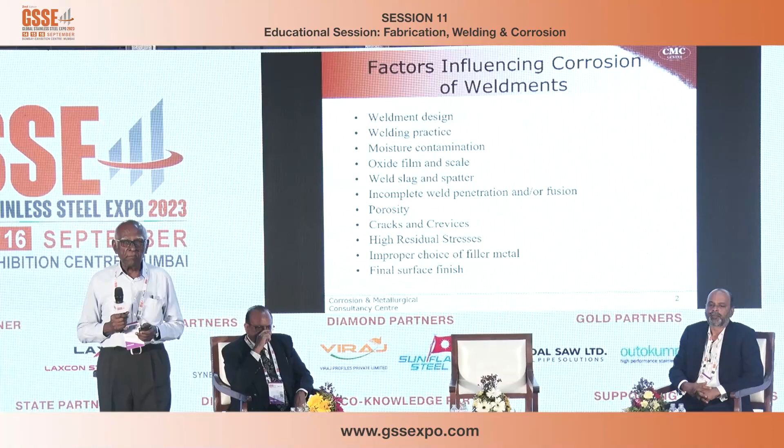But before that, I will briefly mention, Dr. Tanki will expand on some of these items - the factors influencing corrosion of weldments. Weldment design is most important; it should be flush with the parent metal. Welding is after all a joint. If there is any problem with design, you will enter into corrosion problems at that weak point.

The welding practice is very, very important, and the man who is doing the welding need not be an educated man, but he must be thorough with the process of how to make a welding practice.

Moisture contamination is very, very important. The moisture contains hydrogen, and this hydrogen, if the electrodes are not properly dried, will enter into the base metal, not only base metal but weld metal. During welding, water may evaporate, water may dissociate, and then hydrogen will enter. Hydrogen is the smallest element in the periodic table, so it will enter just like sugar enters water, leading to hydrogen cracking and moisture contamination problems.

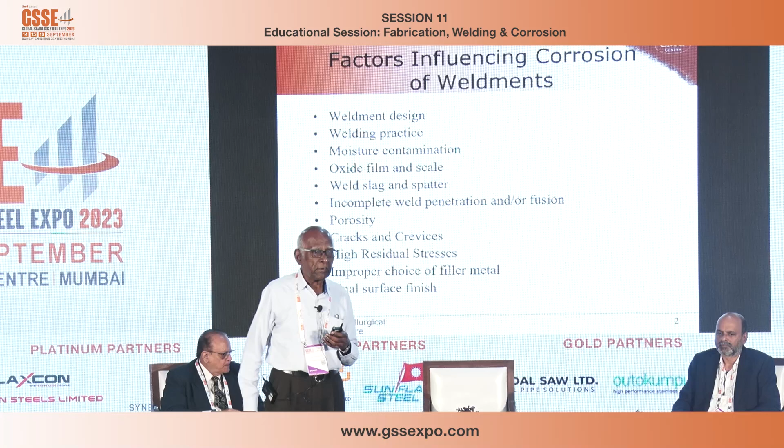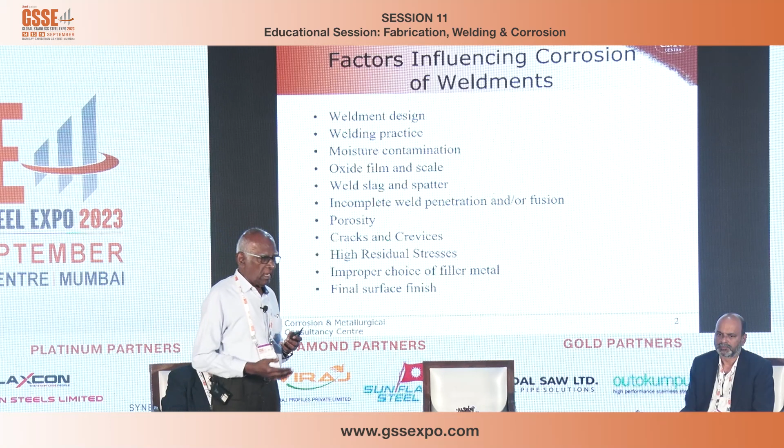So your weld joint, your electrode, everything must be absolutely pure without any dirt or wetness. The oxide film and scale - that is what we call rusting - so all the rust has to be removed if it is steel. And if it is a non-ferrous metal, some aluminum or copper welding, we call it oxide film. The rust is the word used only for steel. So oxide film and scale, weld slag and spatter.

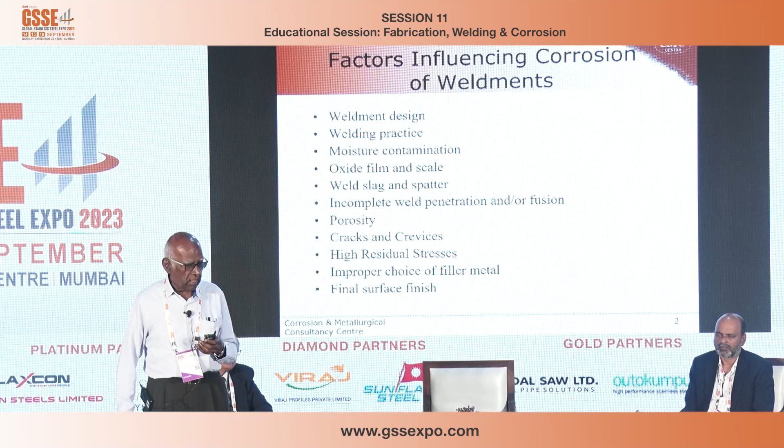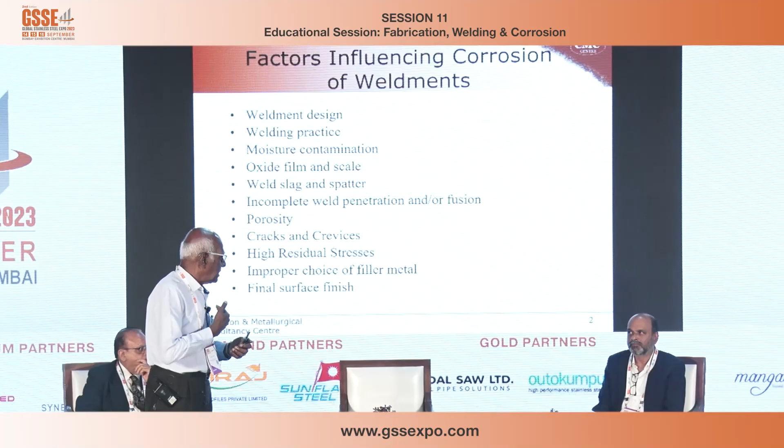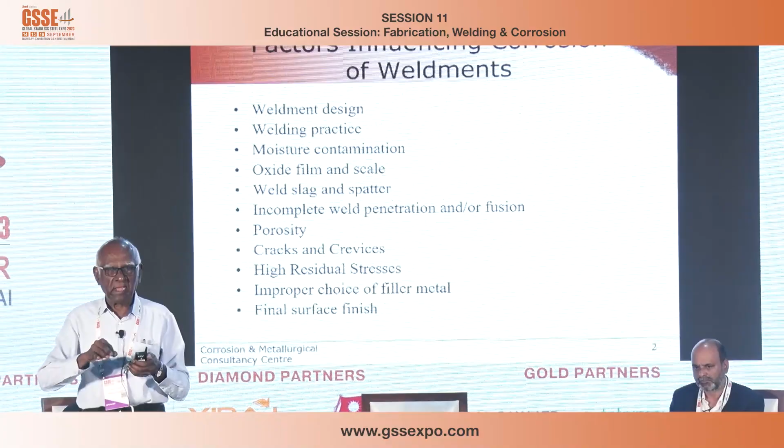During welding, the molten metal doesn't just evaporate, it spatters. I'm sure Parthsarthi will know better - very big companies have a separate workshop for carbon steel and a separate workshop for stainless steel, so you don't mix stainless steel welding with carbon steel welding. You should have this separated, because as soon as hot slag comes and sits on a stainless steel surface, that particular location is no more stainless steel, and you'll get into a corrosion problem there.

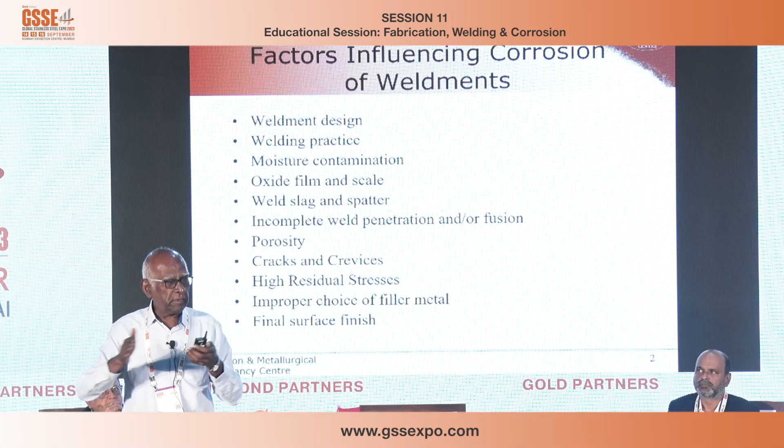Incomplete weld penetration or fusion - if you are welding say about 12 mm thick or 10 mm thick pipe, how do you make sure the welding is okay at the bottom? The weld seems to be okay at the top, but not at the bottom. That's why with incomplete weld penetration, if the weld joint is not proper, there is a small crevice between the two plates welded, and there water will go and stay stagnant, leading to localized corrosion.

The whole purpose of choosing stainless steel is lost - you don't want corrosion, so you have chosen stainless steel, but unfortunately you have not taken the precaution, so it started corroding. So that's incomplete weld penetration.

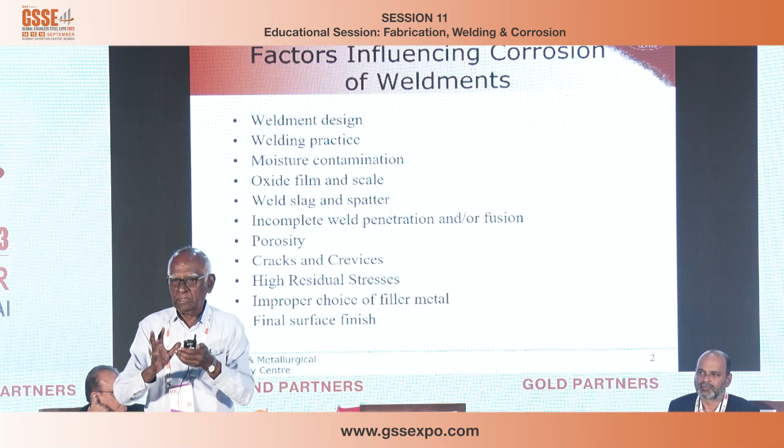Porosity - the moment the molten metal solidifies, if there is any gas present, it will become a pore, meaning it is not stronger. Like a chalk piece, it will break. Like a sponge, it will act as a sponge, not as a solid metal.

Porosity, cracks and crevices - if your plate is not properly fabricated, those cracks and crevices will lead to unusual, unwanted corrosion problems. High residual stresses - when you bring two plates together and weld them, the plates originally are free, and then you bring them together by fusion. The moment you cut off the fusion, the plate will not stay in the same position, it will fly off. That means there is a certain amount of residual stress.

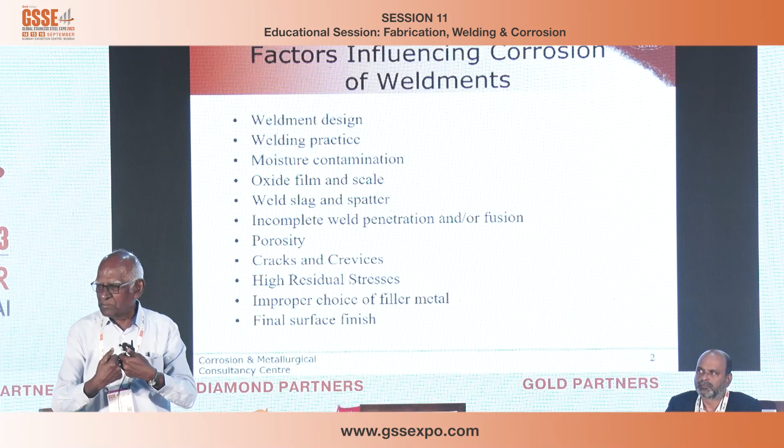Like end of the day, I don't know how fresh you are in the morning at 9:30, but right now you are loaded with so much in the brain and eyes. You are under stress, residual stress, and that residual stress is there on the plate also, so it won't show up. That will lead to a problem. Corrosion has got a soft corner to occur only at the residual stress area.

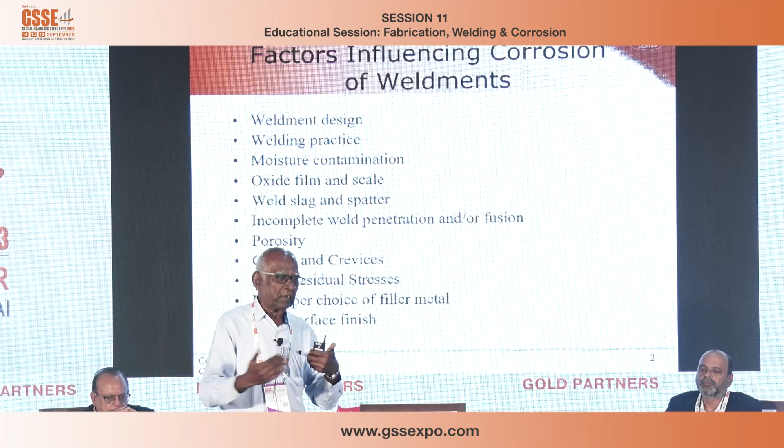That is why the plates are all annealed. The moment you draw a plate from 10 mm to 2 mm, you are putting a lot of work on it. So that work has to be annealed. Annealing means you remove the high residual stress.

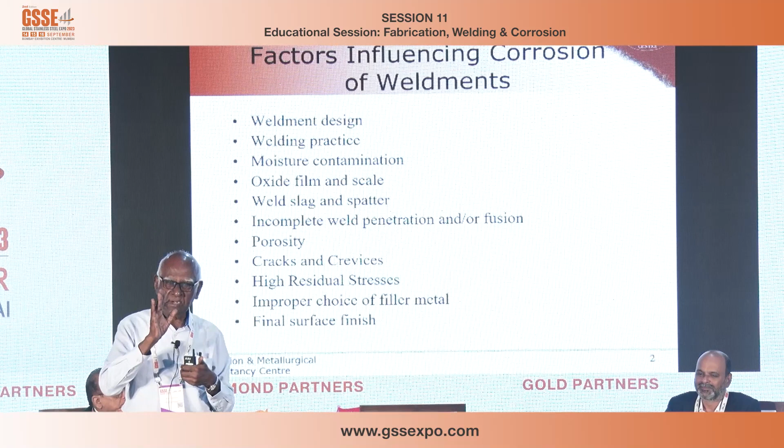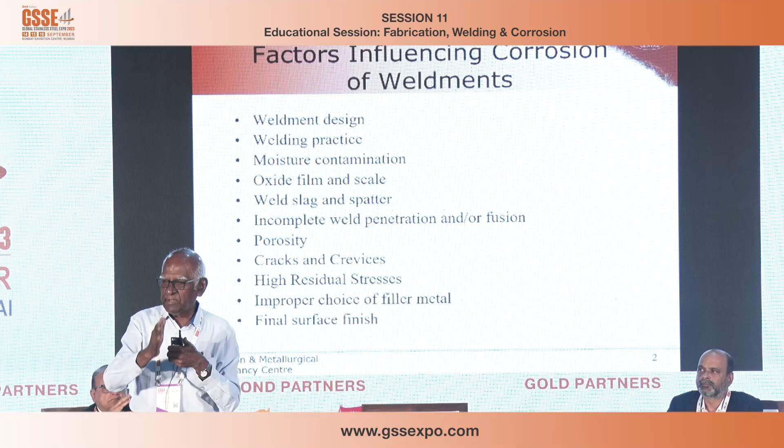Improper choice of filler metal. So many electrodes are there, I don't want to mention the company, but there are big companies specializing only in electrodes. You have to choose a particular electrode - there are 101 of them. How many of you have gone to the shop? Every pavilion you will see 51 grades mentioned, 100 grades mentioned of stainless steel. For every stainless steel combination there is a specific electrode, specific filler metal, specific wire, so that you have to choose. If you are wrong in choosing, you will end up in a problem.

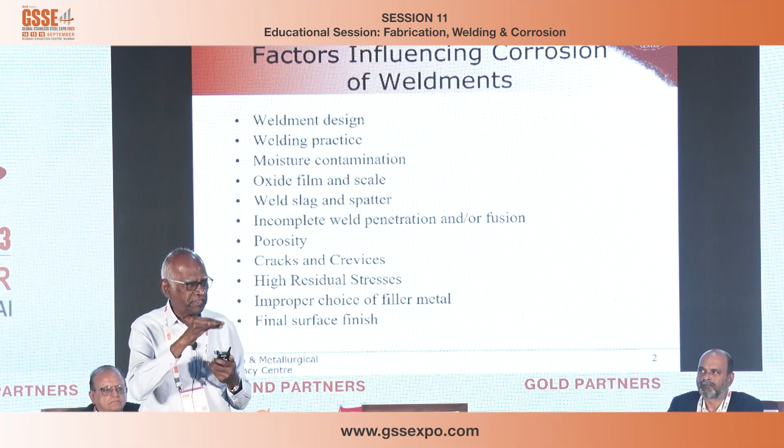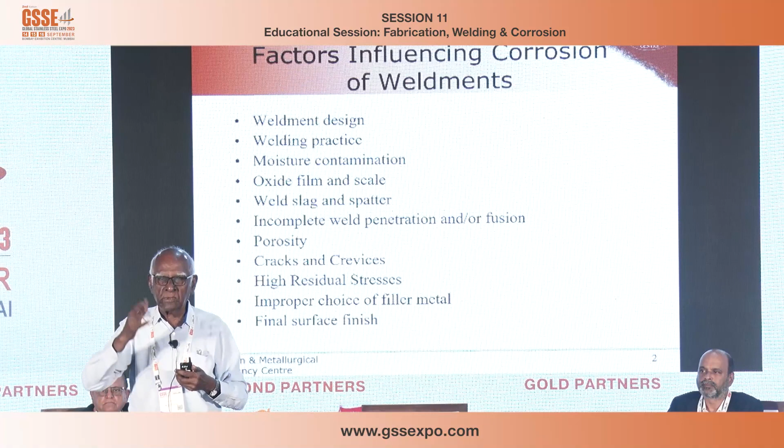Chloride is very bad for stainless steel. But in our household we are dumping so much salt, sambar, rasam on stainless steel - why is it not corroding? Because you are continuously washing. If you allow something to remain there, you will see rusting there. So because of that same process, the same stainless steel plate, if you put in seawater and let it remain stagnant, you'll get a problem. These are the kind of things you must be very careful about in using stainless steel.

And metallurgical factors - being a metallurgist, welding is a part of metallurgy, and there are specific metallurgical factors affecting corrosion of weld assemblies: micro segregation. In the previous session, Dr. Kamachi Mudali was mentioning the effect of small intermetallic components or different phases. So micro segregation within the stainless steel itself, precipitation of secondary phases.

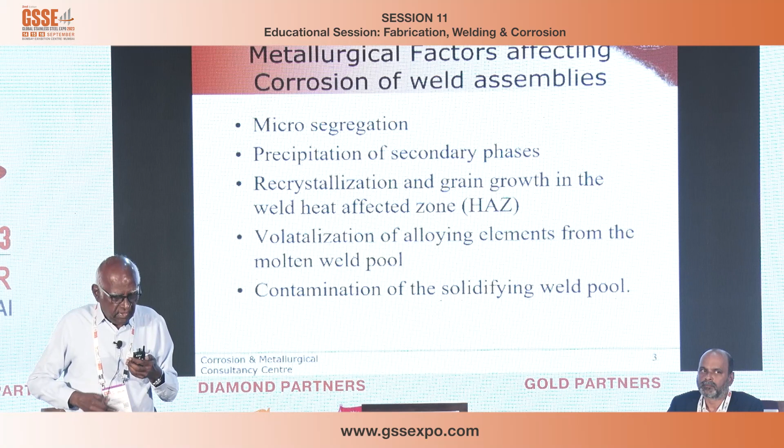I don't want to go through this in detail because there's a lot of metallurgy involved in all these words - recrystallization, HAZ means heat affected zone. These are all metallurgy, but it's very, very important to get the full benefit of stainless steel and to get the full benefit of weld joints.

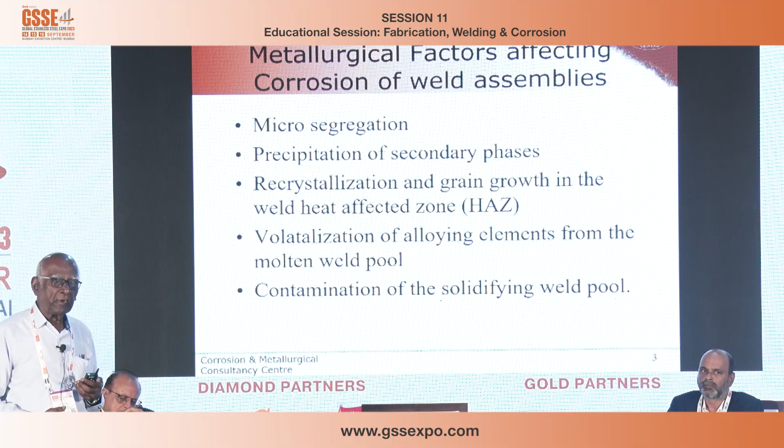That is called a heat affected zone. These are the areas where corrosion will take place, so you must be very, very careful not to have these defects. You can see a couple of companies I've seen that specialize in removing these tints.

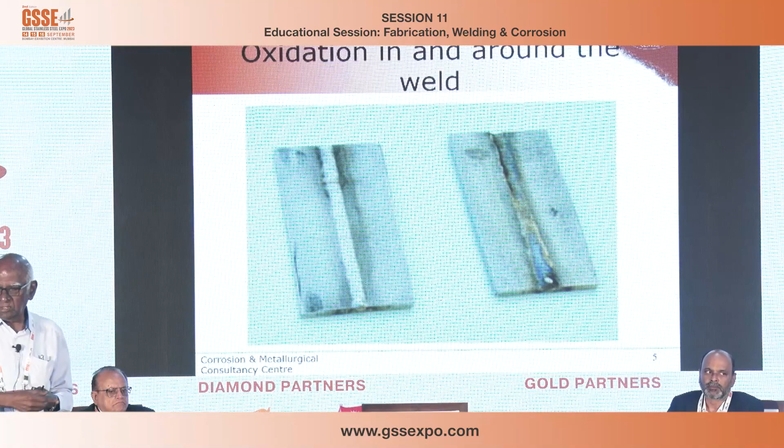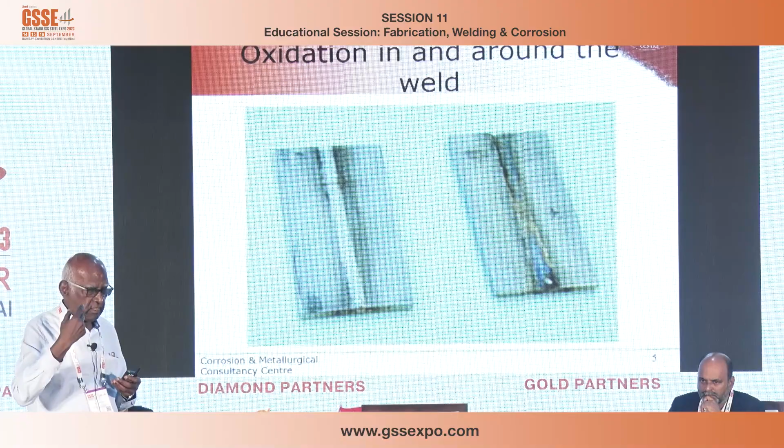This is oxide film - you can see a brownish film. When I say stainless steel, it should be very smooth. That smoothness is not there, and that film affects the so-called chromium oxide, which is very important for corrosion resistance, so that has to be removed.

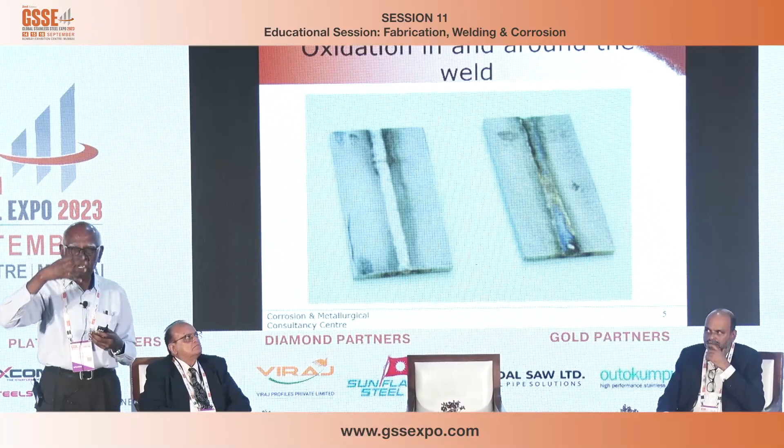It is only polished outside, not inside. So I have seen quite a lot of corrosion problems inside the water tank. This is the problem there.

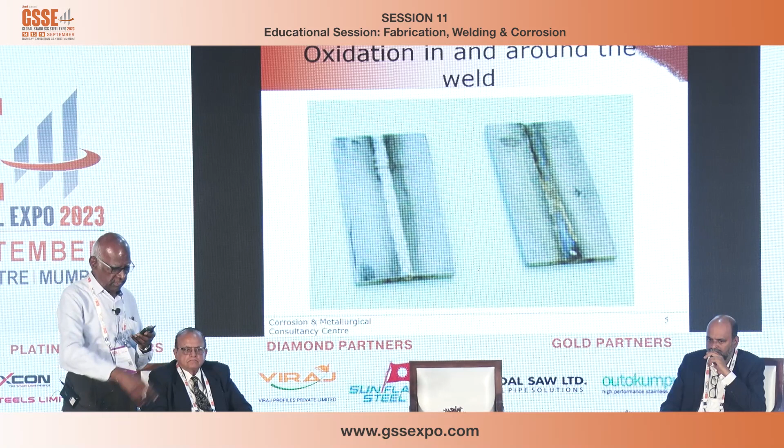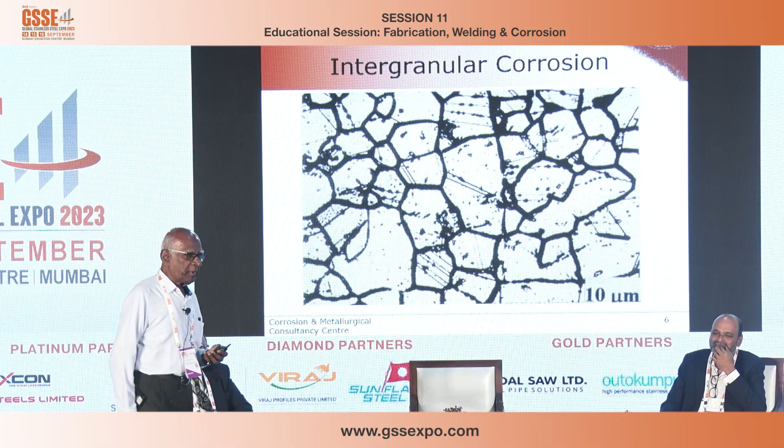So this is a little more metallurgy - after welding, grains are affected. I don't want to go through this at the end of the day - the word intergranular corrosion is high metallurgy. People are getting PhD topics only on that word. So at the end of the day, probably at 6:30 in the morning I can teach you on this, but not at 6:30 in the evening. It's a lot of metallurgy, but it's very, very important.

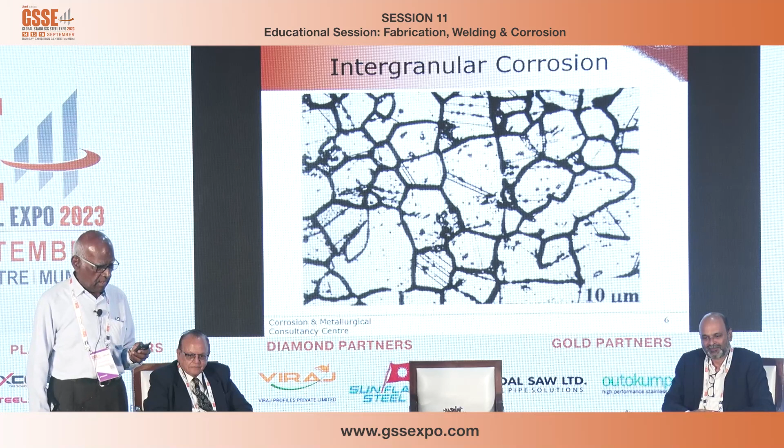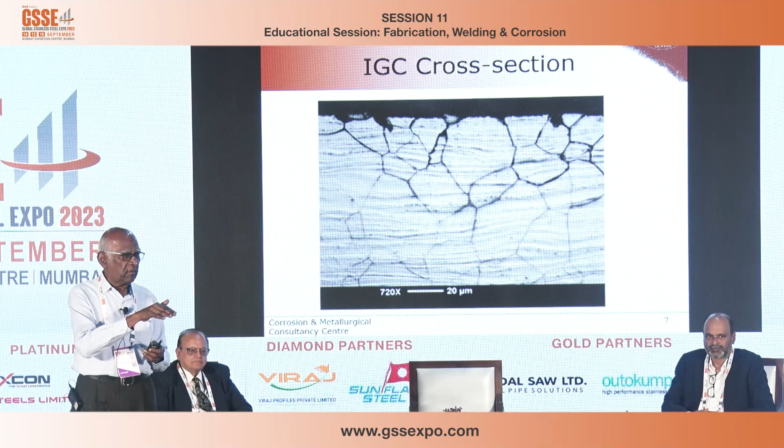So this is how the thickness is lost. You can see part of the thickness is corroded by looking at the dark lines, like a mud pattern. Those are the dark lines where corrosion has occurred, whereas on the top surface, you don't see that much corrosion.

So if you go to a company and bring an ultrasonic wall thickness detector, it won't show any loss of thickness, but corrosion is there. This is very important. It's a localized corrosion, not a wall thickness reduction. It is very, very localized corrosion without showing any NDT value for thickness reduction.

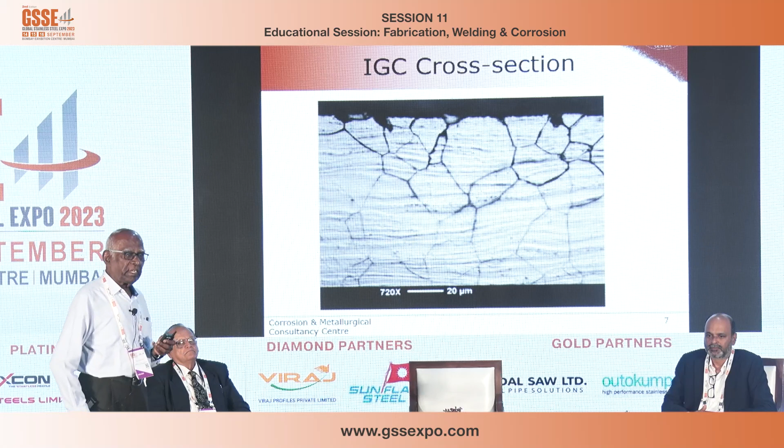So all these are important. By very careful welding and very careful annealing after welding, which is called solution annealing. Like if you put sugar in water, it dissolves. Similarly, you can put chromium in steel and it will dissolve, or carbon in steel and it will dissolve. That is why it is called solution annealing, and that will remove this problem.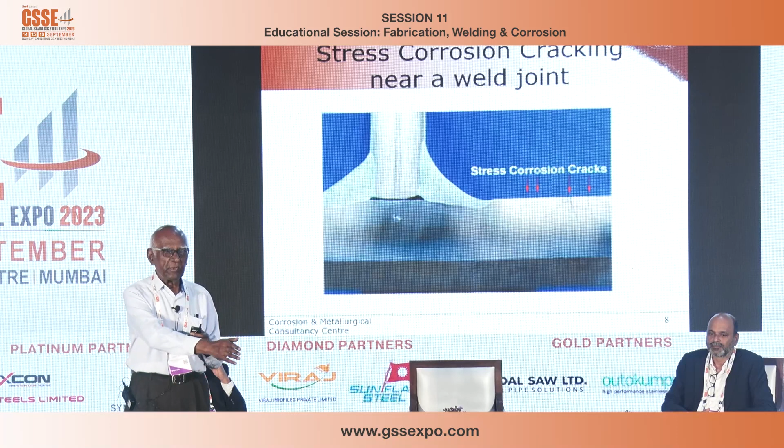This problem is very, very dangerous compared to ordinary corrosion. Ordinary corrosion is what we call rusting. The rusting is something that forms, you know, and that is something you can rub off, but you cannot rub off this. So this is a very dangerous form of localized corrosion.

So with this background, I'll spend another 5-10 minutes and then hand over to my friend's presentation. I'll make one typical case study. I don't know how many of you are from the chemical process industry, but you'll be able to appreciate the problem.

This talks about a 14-inch diameter, 8 mm thick stainless steel pipeline, which suddenly failed after a couple of months of service. It was meant for 25 years of service, but it failed after only a couple of months. This is from a fertilizer plant.

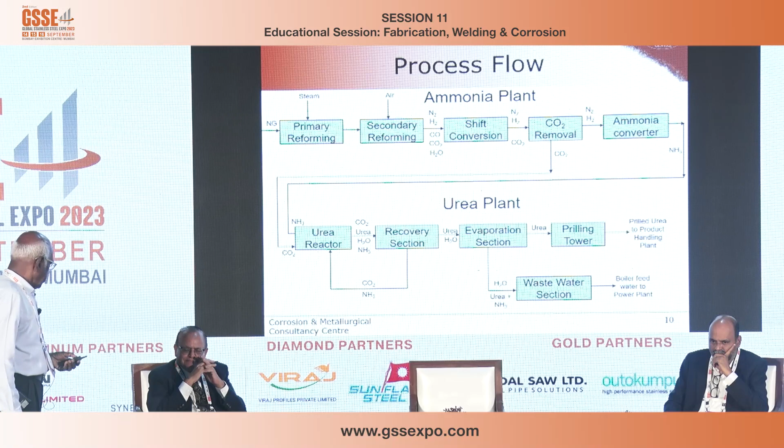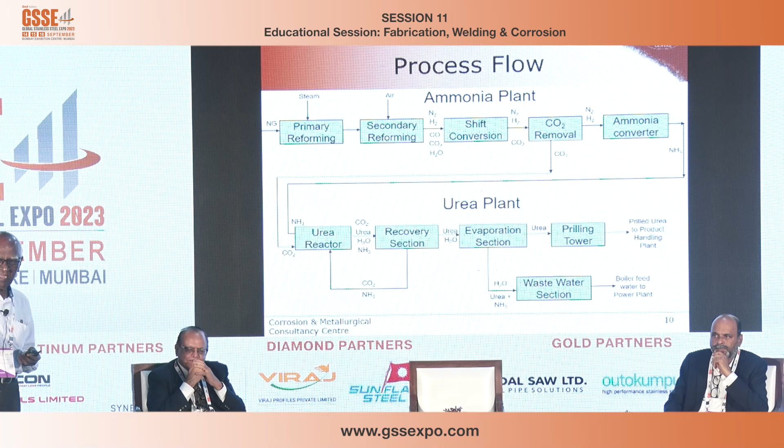You can see urea is made out of ammonia and CO2 combination. You have to remove the CO2 and send it to the air, and balance the NH3. That's why we talk about green nowadays. Again, you react with CO2 to produce urea.

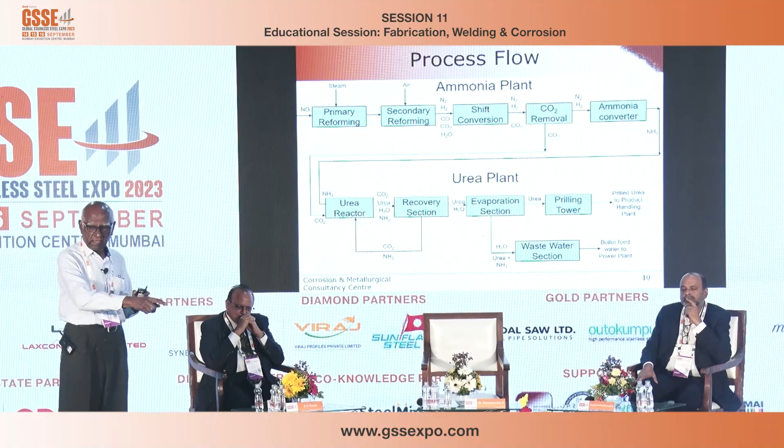So at one particular location, in normal practice - Dr. Tanki will be expert on this - most ammonia plants use carbon steel metallurgy, whereas the urea plant uses stainless steel metallurgy. So this happened in the urea plant circuit.

That particular location is called the vacuum preconcentrator section. We won't go into detail, but that particular line, shown in red color, suddenly burst. Even though the plant was designed for very high pressure.

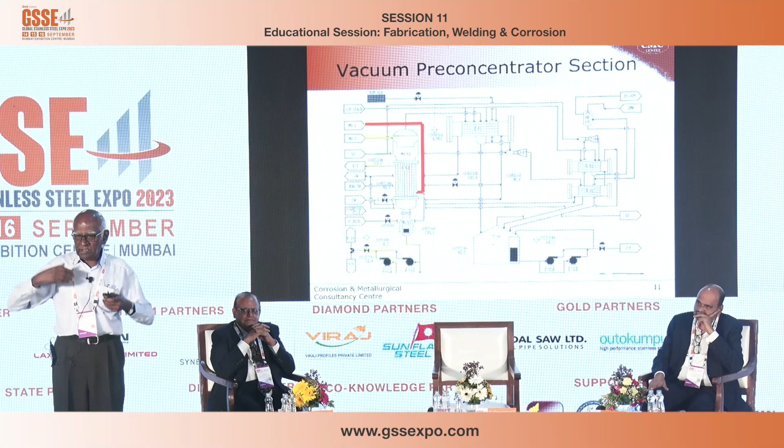Fortunately, it was an automatic plant, so nobody was injured, unlike Bhopal, where suddenly a pipe burst killing so many people. But here, nobody was injured. But you can look at the stainless steel pipe.

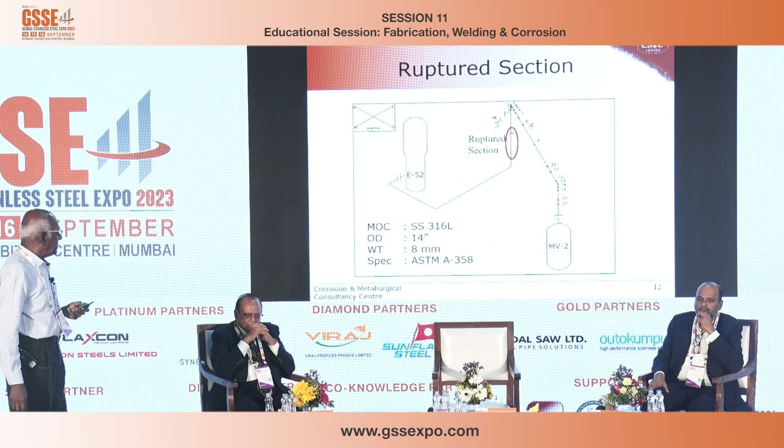And this is a little detail. You can see at the bottom, it's 316L stainless steel. If you go through all the pavilions, 90% of the shops talk about 316L stainless steel. It is 14-inch diameter and 8 mm thickness, made out of ASTM A358. All these are standardized.

It's high pressure, high temperature urea solution that suddenly burst. If you were there, you couldn't even tolerate a few seconds. Fortunately nobody was there, since the plant is computerized. And it happened during the night shift.

See, the parent metal is okay, it is not thinned down. It has not become like a balloon and then burst. It's purely that something is wrong with the weld. This we call a dead body - a pipe is a dead body, there's no use of that. So we are like post-mortem doctors. It is very useful for us.

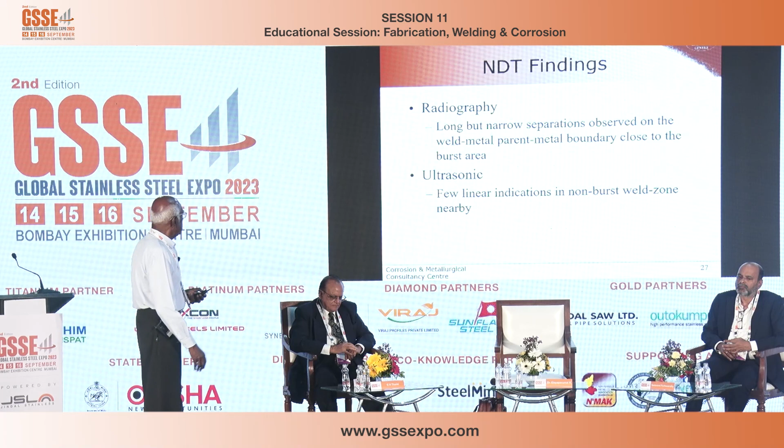So crevice corrosion has happened here, and that is the cross section of the ID and the cross section of the middle of the fracture surface. Radiography and ultrasonic showed definitely there is a partition between the weld metal and the parent metal.

But that has been assumed as not going to make any problem, so the third party inspector passed the pipe. The diagnosis: incomplete fusion of the parent metal and weld metal on the inside surface over a distance, that formed a longitudinal crevice corrosion.

That's a form of corrosion - we don't want to go into the detail. There are several forms of corrosion, out of which crevice corrosion over a period of time, which is only for a few months, causes gradual reduction of the load-bearing wall thickness. At that particular location, it has become a balloon.

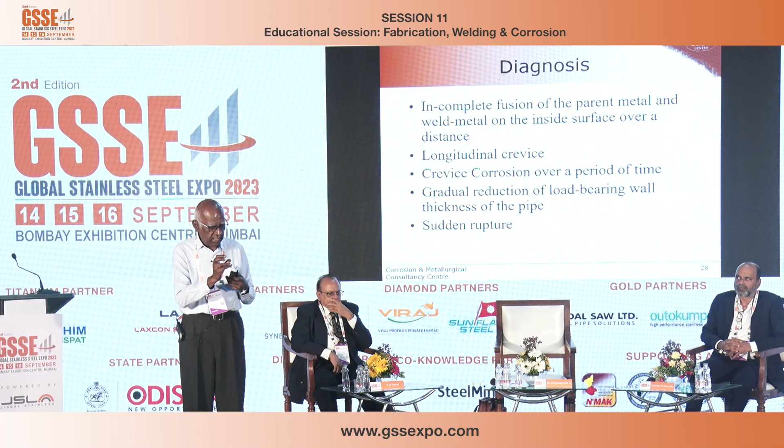So it is a sudden rupture. This should have been avoided by proper radiographic inspection carried out during procurement of the pipe. The radiography inspection is to check the soundness of the weld, and the pipe may be qualified, but not the weld joint.

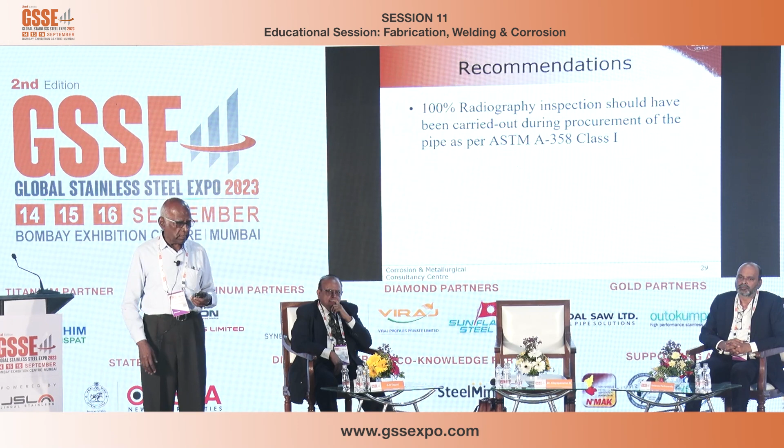Thank you, we get into the topic of fabrication, welding and corrosion. Dr. Ilember Perumal has already set the standards for this session. Right from morning I was sitting in this room listening to various lectures, starting from Mr. L.C. Trivedi from the railways, talking about various components like wagons, coaches, and various other parts of the rolling stock. I would like to say all these are not possible without welding.

I would proudly say Fronius is the name of the company I represent. We are actually doing the welding and joining of the entire metro manufactured by Alstom, and also the manufacturing of the coaches running in Pune, which is once again of aluminum alloy.

We are also making a lot of nation building exercises, like we are a part of Chandrayaan 3 in terms of making the entire components for the launch vehicle Mark 3. Fronius is one company manufacturing welding equipment used for various joining processes. The first part about wagons was also covered by me.

Dr. Kamachi Mudali was talking about defense manufacturing, and Dr. Gunasegar from the Naval Materials Research Lab. We are also associated with various research labs in India, and we provide support for nuclear submarines - we are welding the nuclear submarines, and we are part of projects like Scorpene and many other leading projects in India.

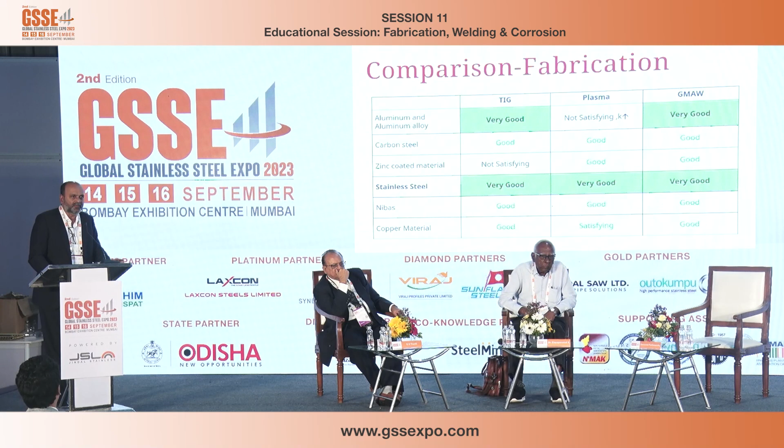But before that, I would like to tell you there are various metals available which are weldable, like aluminum alloys, regular carbon steels. There are coated steels called zinc coated or galvanized steels. We also have stainless steel, certain nickel based alloys, and copper alloys.

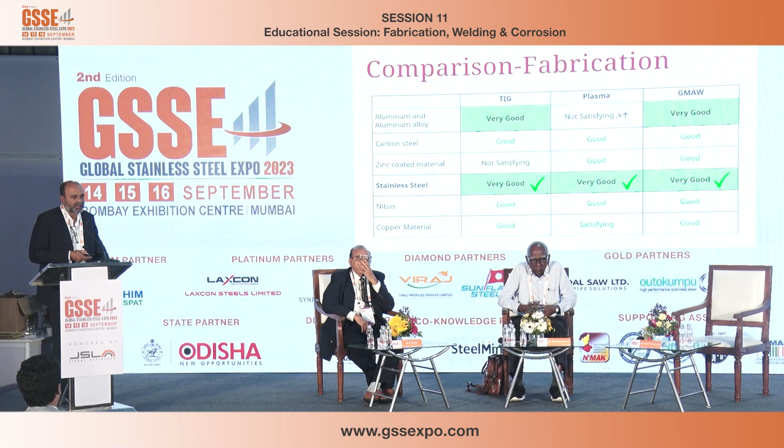So out of all these alloys, stainless steel is weldable with all the processes - TIG welding, plasma welding, or even MIG welding, it's very much possible with all welding processes. So let's go to the next type of welding, where you can see a new process name called cycle TIG.

Cycle TIG is used for stainless steel, which has been displayed today in our pavilion. Cycle TIG is nothing but an interval TIG welding, which uses a polarity called direct current electrode negative polarity.

What is the advantage of cycle TIG? Our moderator was explaining about the weld puddle and how you are able to control it. This can be very easily controlled with this process, and we can have a combination of pulsing in TIG along with a function called tacking.

We also have to have very controlled heat input on stainless steels, particularly with respect to the austenitic grade of stainless steels, the 300 series. So we can use this process for that.

There is another aspect called temper colors, which is nothing but oxidation, causing various color changes in stainless steel. When it comes to the aesthetic part, it is very important. So let me show you how cycle TIG looks when used on stainless steel.

Here I take an example of a 1.5 mm thick material and a 4 mm thick material, where you can see the look and feel of cycle TIG when I weld a 1.5 mm fillet weld - this joint is called a fillet joint - where you can weld even 1.5 mm thickness without any change in the color of the weld seam. You can see the heat affected zone is very, very controlled.

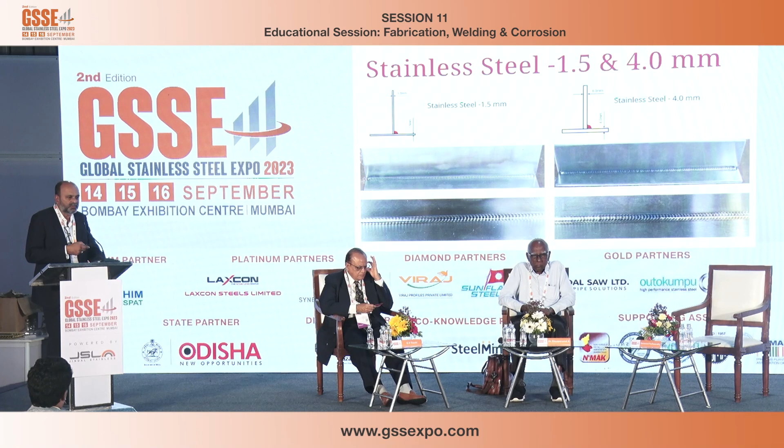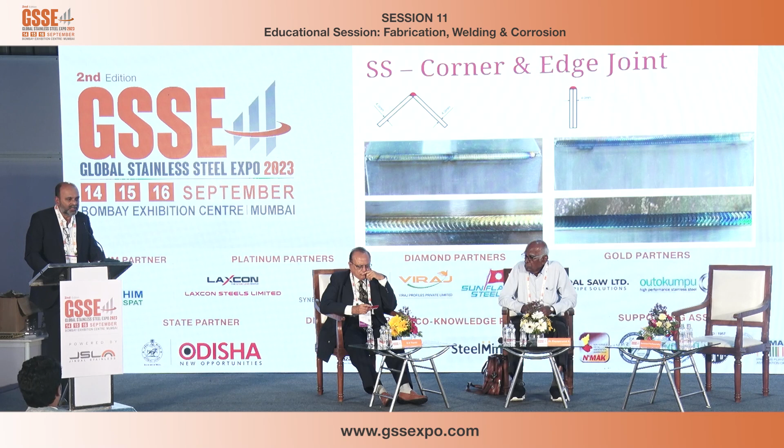Then coming to other types of joints - the corner joint shown here, and then an edge joint. You can see the weld seam is very uniform. These are all done by manual welding process, and this was displayed for the last 3 days at our stall. My colleague here has also done the welding, and this is very much possible with stainless steel.

So moving forward, you can see a cycle TIG process done on a 1.4301, which is nothing but the 304 grade of stainless steel, 1 mm thick, with very low amperage and very low heat input. That is very important.

Somebody who can appreciate welding can see something called kilojoules per centimeter, which is 0.778 kilojoules per centimeter in this particular 1 mm thick component. This is possible with a special gas nozzle called a champagne gas nozzle, which gives a very high amount of gas flow with the help of a special gas lens. I will be able to weld even a 1 mm thick material without any undulation or distortion.

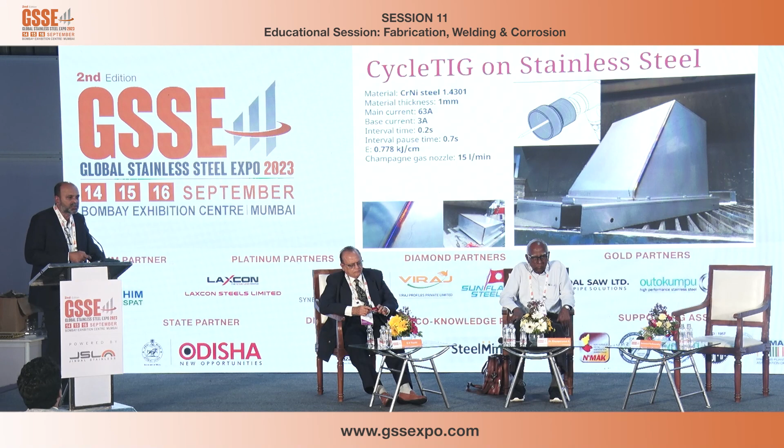These are all technologies used for areas where weld aesthetics play an important role. Now suppose I want to build on an edge, like you can see some sawtooth kind of formation in this picture. I can show you how I will control the heat input and weld on these particular tooth points.

I would request our friends to play the video so that you can at least hear. You can see how the control is.

Those who have not seen the exact process can appreciate by looking at how controlled heat input plays a major role in interval welding. You can even have a very low heat input. So I will move on further.

This is another important aspect I'd like to touch upon - titanium. Chromium, titanium, and all these alloys have very high affinity towards oxygen, but still I will be able to weld a titanium alloy without any kind of protection. Here also there is a video.

Because of paucity of time, I'll switch over to the next, which is called the TIG dynamic wire. In TIG welding, normally a manual intervention of feeding the filler happens. But today we will be able to do this even with a hand, using a separate arrangement with a separate kind of pen.

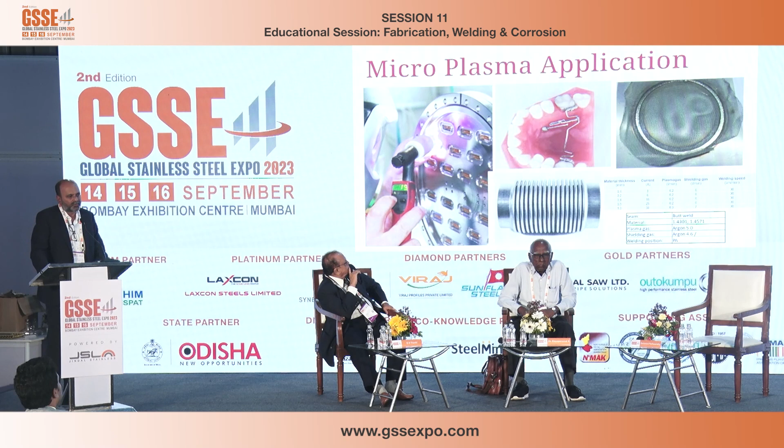Moving on further from TIG welding to plasma arc welding. Microplasma is one process where I can even weld 0.1 mm thick material. You can see some dentures, dental fixtures, and some kind of bellows which are 0.1 mm thickness. This is also possible to weld - this is stainless steel, both 304 and also 316L. With the help of microplasma, we have welded these kinds of applications.

Moving on further, we have soft plasma. This plasma arc welding can be used in various exhaust components, and here you can weld from 1 mm to 3 mm. This is another kind of application in stainless steel, particularly for plasma welding - this is called soft plasma.

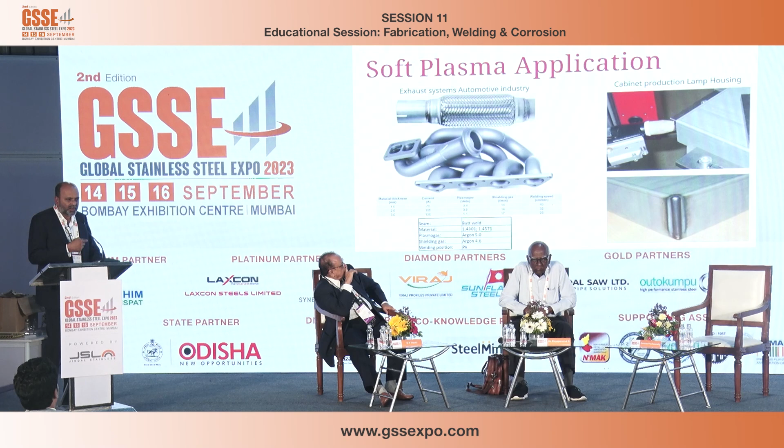Moving on further, for high thickness you have something called plasma keyhole. Here we can weld up to 10 mm thick material with the help of plasma keyhole. We create a keyhole and move on and we are able to do the welding. I have given certain parameters also wherein I have even gone up to 10 mm thickness. So this is the various kinds of processes in plasma.

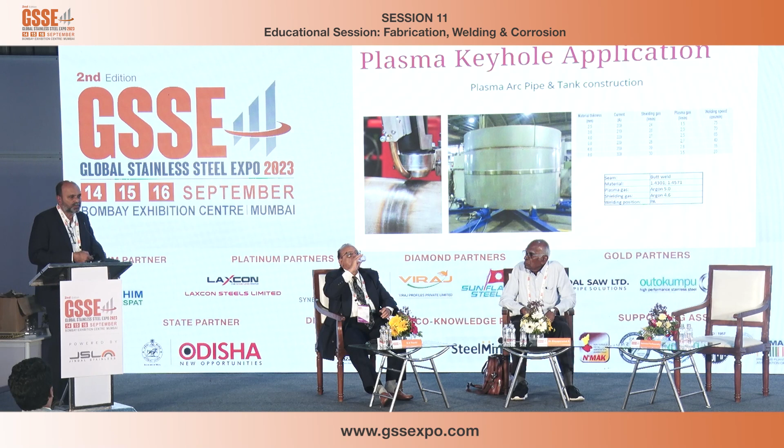Furthermore, gas metal arc is another process conventionally called MIG-MAG welding. Here you can see a process called cold metal transfer. You can see this video - can you play the video? That will give you some idea.

This is a patented process of Fronius, where there's a separate mechanism by which the wire moves forward and backward, and I will be able to even join steel to aluminum. This is the process advantage, and you can see here this particular robot is being programmed to make a kind of an additive manufacturing component from nowhere. You can build from a substrate and build a component with the help of this.

So today, welding is not what we see on the roadside. Welding is something we call from 3D to 3C. Welding was originally very dusty, dangerous and dirty, but today it has become very cool, clean and clever. So we have moved from 3D to 3C. This is what welding is in the industry today.

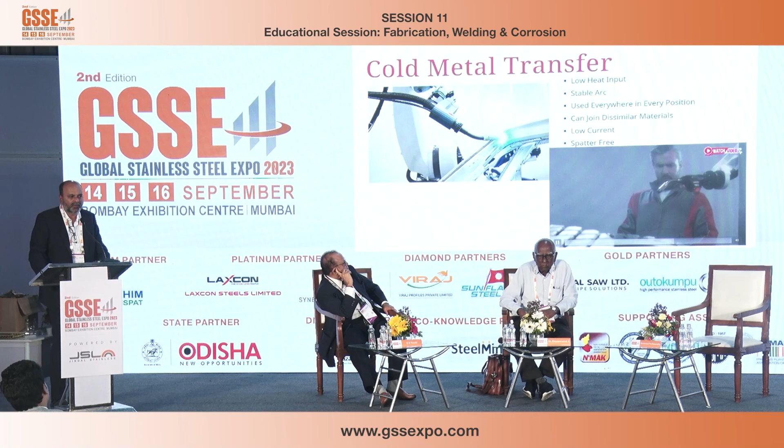This is actually the specific patented process of Fronius, called cold metal transfer, where with the help of this you can build, join, clad - all types of processes in one kind of process, which is called cold metal transfer.

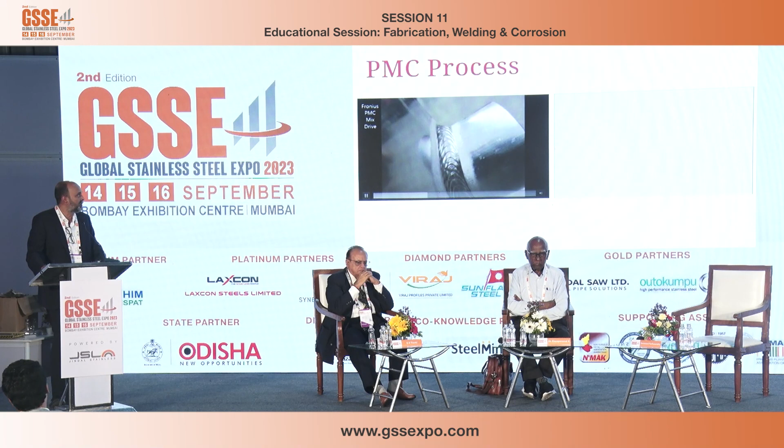So here, something called pulse multi-control. This is another process of GMAW, wherein you will be able to weld with the help of the robot, where you can have a kind of weld seam, which will be shown to you now. You can see the seam, which is a modification of pulse welding. It's called pulse multi-control, where I'll be able to weld this kind of seam, and all the ill effects of heat can be avoided.

A welding engineer can understand the sound, and he can tell what kind of process is going on. So here it is actually a pulse process, a modified pulse process.

I would request to play the next video also, so you can understand how robotic welding helps in welding of stainless steel. So here is an experiment we did for L&T Ranoli, where we used this pulse multi-control process. I am not showing you any component because of NDA, because of certain non-disclosure agreements. This is just a kind of fillet joint with a robot, once again on stainless steel.

You can see the deposit when the welding is complete. This was done at our skill center in Pune, Innovation and Skill Center, where you can see such weld seams without spatters, without any kind of color change. So these are all possible. These processes are being used in the industry where high productivity is required for thicker grades of stainless steel.

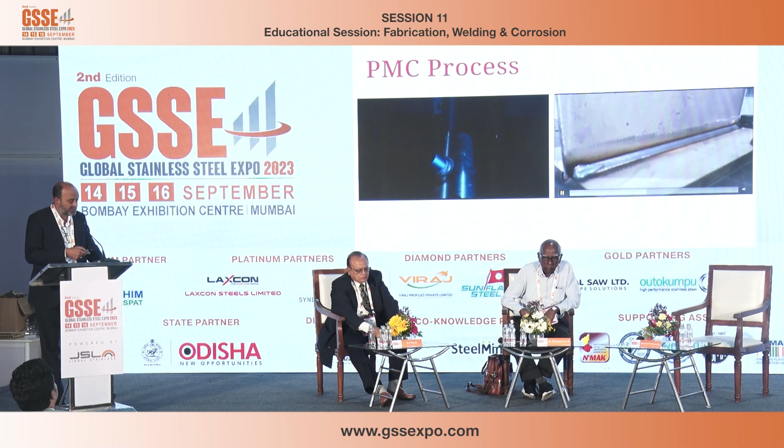Furthermore, additive manufacturing is another area where you can actually build components from nowhere. You can take a substrate, and with the help of the filler wire, keep building components, and then machine it further. So the conventional process was subtractive manufacturing, but today with stainless steel you can actually make components as well.

You can make components like valves. There are components like landing gears. There are components like rocket propellant tanks, which are all made out of additive manufacturing, and stainless steel is extensively being used in many areas.

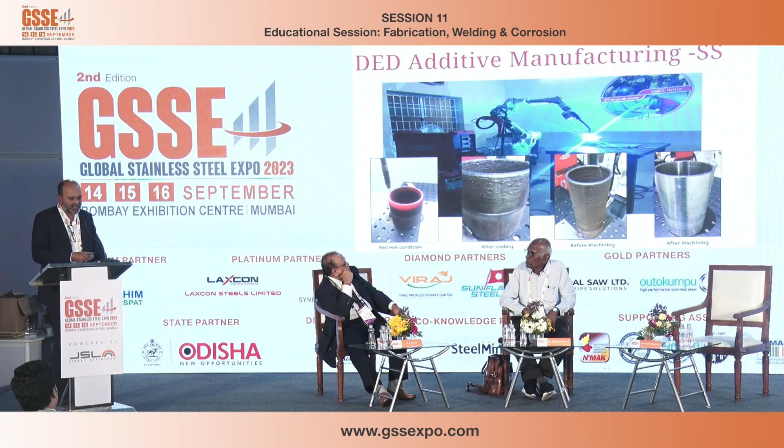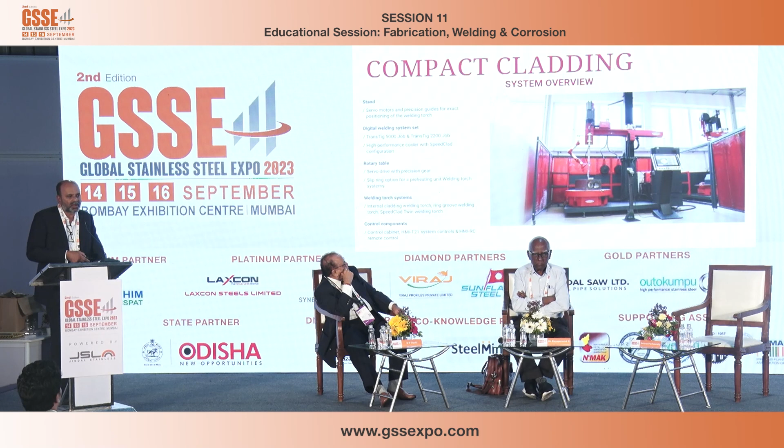Furthermore, mechanized processes - we have many types of mechanized processes possible. There is something called a clamping bench, something called compact cladding. Furthermore, if you want to do mechanized welding, you can also go for a circular welding mechanism, where you can mount the component and still be able to do the welding with the help of these features, which are called compact welding systems.

Last but not the least, I would like to say we are also working with all the IITs and NITs across Pan-India, where we are able to give them technology transfer. We can make custom-made welding cells.

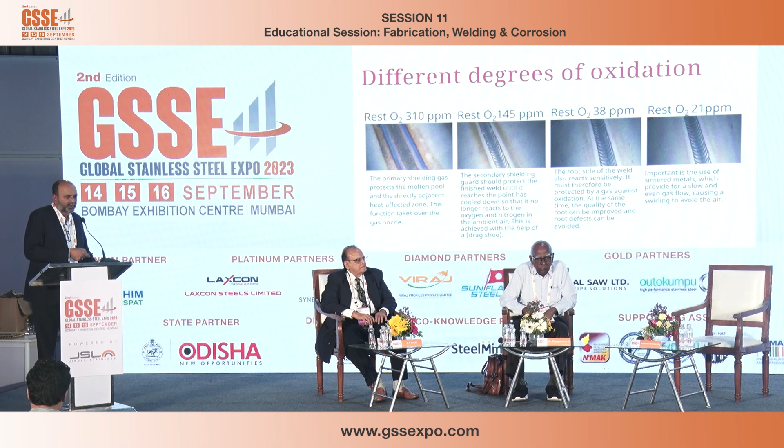These are all the various kinds of oxidation issues. So here you can see the amount of oxygen, which is always less than 20 ppm. Then you will be able to have a very good seam. That's what I want to add on the oxidation front of stainless steel, which has to always be taken care of when you are doing the purging.

So there are various types of purging gases. We can have argon, nitrogen, then nitrogen-hydrogen mixtures, argon mixtures. These are all used in stainless steel when you do welding of a pipe.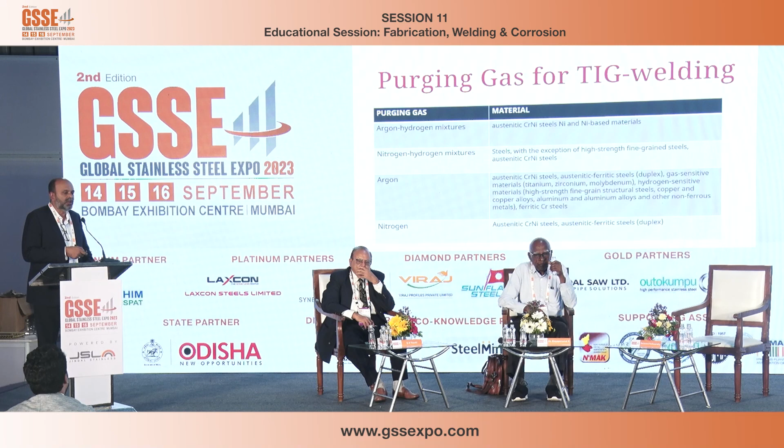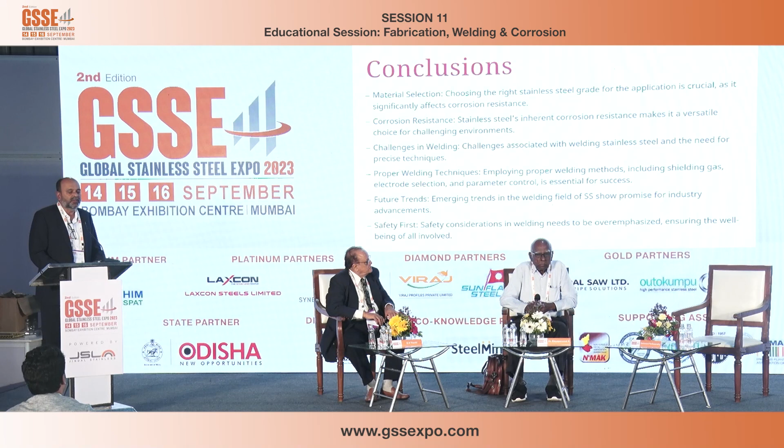So in conclusion, you have to choose the material in the right way. Then corrosion resistance is a very important aspect you have to check. And there are many challenges in welding, but we will be able to take care of the challenges by using the proper technique. And the trends are emerging. And above all, safety is very, very important when you are actually doing the welding. And this also has to be considered. And with this, I conclude.

Thank you. Talk about a huge plate welding. You can see the range of application of welding. So Fronius, we are very lucky to have Fronius with us. And now we go back with full confidence. There is somebody to suggest welding and somebody to execute the welding.

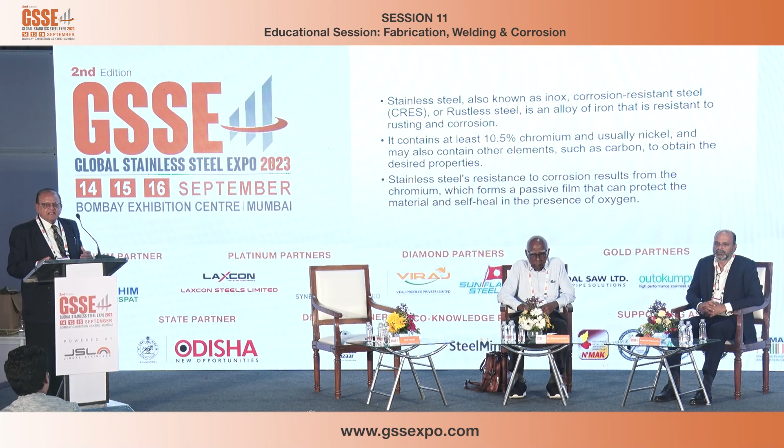Stainless steel, also known as inox, corrosion resistant steel or rustless steel, is an alloy of iron that is resistant to rusting and corrosion. It contains at least 10.5% chromium and usually nickel, and may also contain other elements such as carbon to obtain the desired properties. Stainless steel's resistance to corrosion results from the chromium, which forms a passive film that can protect the material and self-heal in the presence of oxygen. I think these are the basics, but it will give you a good runway to fly ahead.

The alloy's properties, such as luster and resistance to corrosion, are useful in many applications. Stainless steel can be rolled into sheets, plates, bars, wires, and tubing. These can be used in cookware, cutlery, surgical instruments, major appliances, vehicles, construction material in large buildings, industrial equipment, for example paper mills, chemical plants, water treatment, and storage tanks and tankers for chemicals and food products. So it is a very versatile material of construction, which is the positive aspect of it.

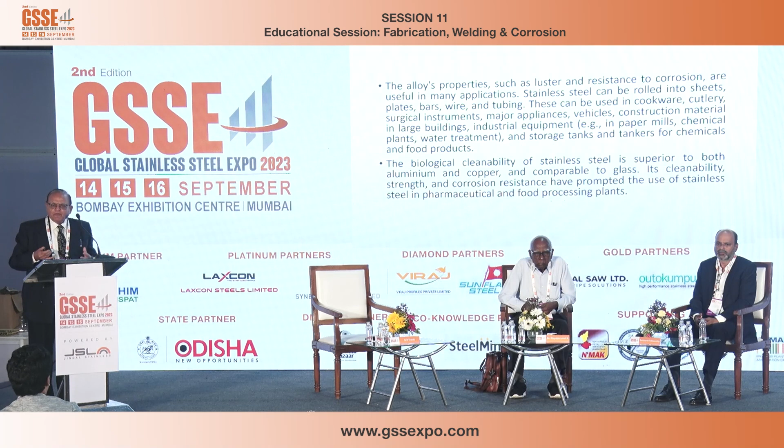The biological cleanability of stainless steel is superior to both aluminum and copper, and comparable to glass. Its cleanability, strength, and corrosion resistance have prompted the use of stainless steel in pharmaceutical and food processing plants also. So we fell in love with stainless steel. Okay, these are good things. But where those good things become a little alarming, that we have to look into.

Six mistakes to avoid in metal fabrication. Metal fabrication is one of the oldest manufacturing processes in the world. Although it has evolved over the years, it still requires a significant amount of training and practice to master. I hope Mr. Shashi will agree in that case, no? A lot of training is required, so you are the good trainer, in reality.

Today there are various types of automated equipment, which we just saw in the various videos which Mr. Shashi showed us, used for the purpose of metal fabrication. While the metal fabricators themselves are trained and skilled, there are certain common mistakes that happen during the metal fabrication process - that is what you want to see at the micro level. Don't forget, as in my first slide, that man is open to mistakes, and welders are human beings. So they are not the culprit, they are the workhorse in that case. These mistakes may escalate while dealing with high pressure and high temperature industrial applications, sometimes endangering the lives of people working. Therefore, this presentation sheds light on the mistakes that are essential to avoid during metal fabrication.

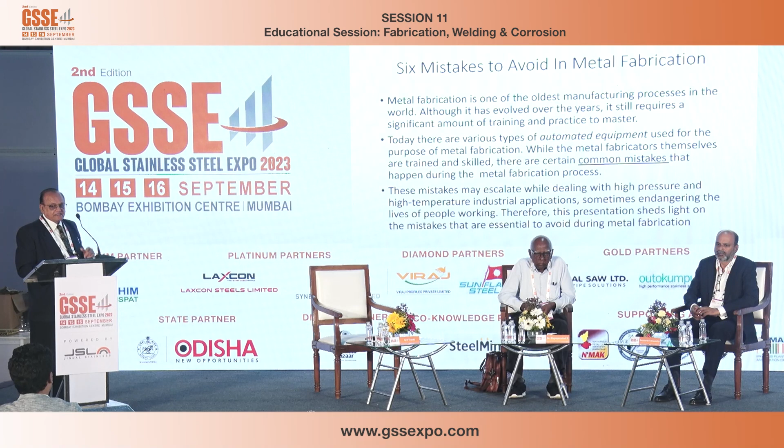Now, precautions to take during metal fabrication to avoid common yet hazardous mistakes. Metal workers are expected to be cautious about the following factors.

First, making pseudo assumptions. Metal fabrication is a mechanical process that impacts several industrial applications. The performance of any equipment depends on its construction and the reliability of integrated parts. Every business has different specifications for metal fabrication, so the fabricator must avoid pseudo assumptions. Instead, he should communicate with clients to understand their technical requirements, which helps reduce manufacturing defects, honor deadlines, offer the right quotations, and so on.

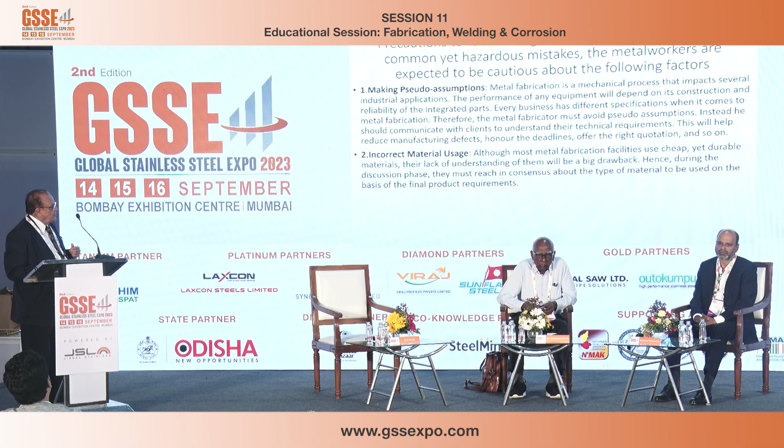Second is incorrect material usage. Although most metal fabrication facilities use cheap yet durable materials, their lack of understanding of them is a big drawback. Hence, during the discussion phase, they must reach a consensus about the type of material to be used based on the final product requirement.

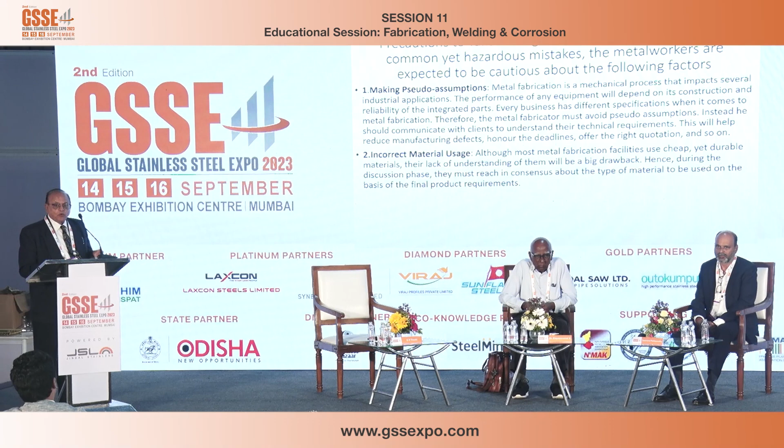These are very important points, which I have brought from experience and from the literature.

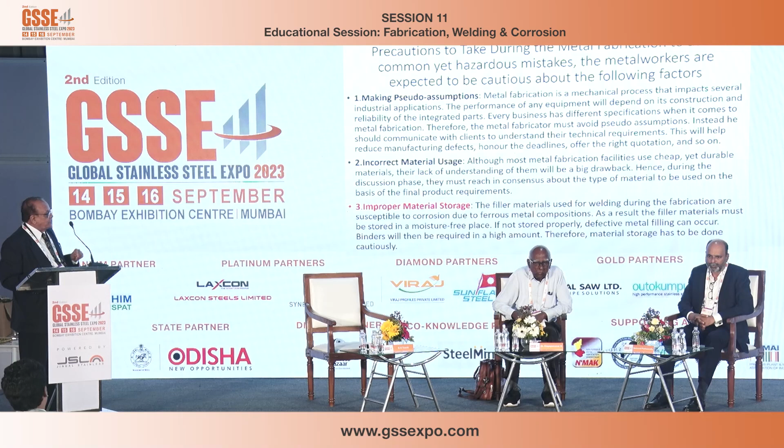This is very important - why improper material storage matters. The filler materials used for welding during fabrication are susceptible to corrosion due to their ferrous metal composition. As a result, filler materials must be stored in a moisture-free place. If not stored properly, defective metal filling can occur, and binders will then be required in high amounts. Therefore, material storage has to be done cautiously.

I will take a pause here and share my personal experience. About 3 years back, six countries, including India, were involved in manufacturing huge stainless steel heat exchangers for Qatar Fertilizer, QAFCO.

When that material was to be installed, QAFCO didn't have time to install it, so they asked for a delay of a few months until they had their downtime. During that time - I won't name certain things as it's against certain laws - they asked us to store it somewhere and said they would come back afterwards. It took about one year and six months to get the order back.

I think one of our people was among the final ones to have direct talks with the Qatar company, QAFCO. After that six months it came and was installed properly. Having an expected service life of 10 years, it failed within 2 years and 8 months.

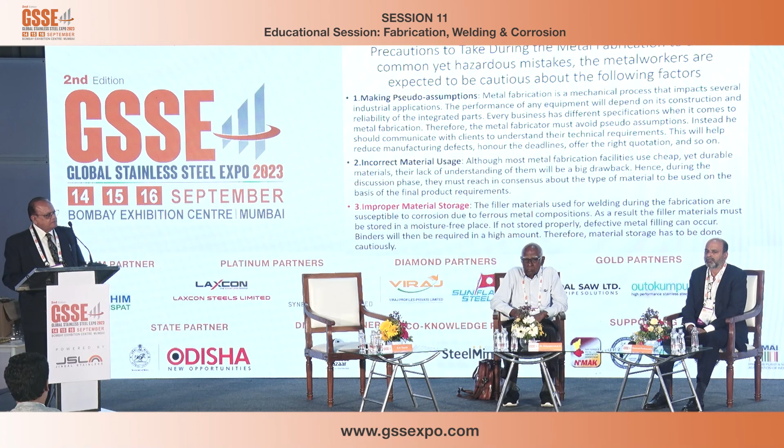Technical inflexibility. Metal fabrication is a process that involves multiple techniques. These techniques may vary depending on the application. Inflexible metal fabricators may obstruct the fabrication process. Fabrication techniques must be tailored to a specific job, and workers need to be versatile. Versatile - I place a lot of importance on this one.

Inefficient time scheduling. Metal fabrication is a process that really relies on factors like material, work consistency, temperature, pressure, and time. The fabrication of metal is a time-consuming activity as the filler metal and welds take time to settle on the application spot. Rushing the job without scheduling proper lead time increases the risk for accidents. The fabrication process must be properly scheduled for productive results.

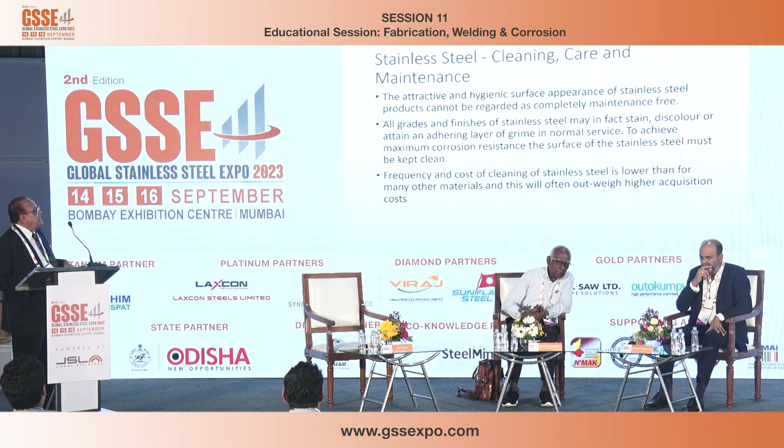Frequency and cost of cleaning of stainless steel is lower than for many other materials, and this will often outweigh higher acquisition cost.

Good housekeeping during manufacturing - this is fabrication. The ideal is to have workshops and machinery dedicated to only stainless steel work. But in a workshop also processing other steel, avoid pickup from tooling used with other metals: grinding wheels, wire brushes, finishing belts, steel storage racks, contamination by grinding or welding sparks, handling equipment, adjacent carbon steel fabrication - which I could see wherever I worked as advisor to the industries. It was my first and foremost advice that they should make a very specific workshop for that.

Getting the best out of stainless steel - main issues include the importance of surface finish in determining corrosion resistance. I will not detail it, I think you will be getting that later on. You can read it because time is running away.

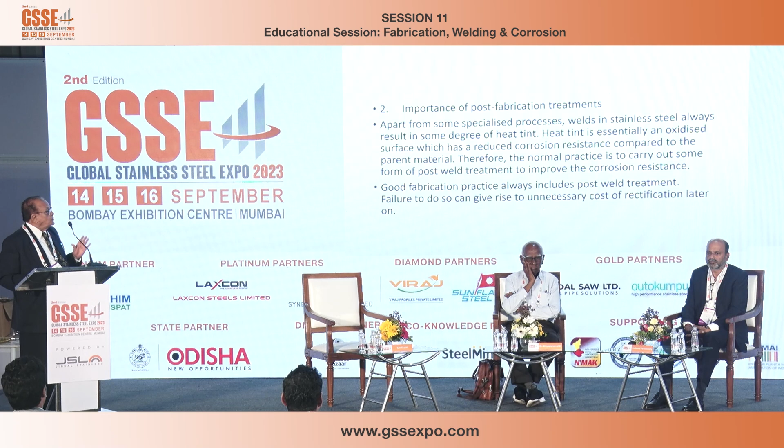Importance of post-fabrication treatment: apart from some specialized processes, welds in stainless steel always result in a small degree of heat tint. Heat tint is essentially an oxidized surface which has reduced corrosion resistance compared to the parent material. Therefore, normal practice is to carry out some form of post-weld treatment to improve corrosion resistance. Good fabrication practice always includes post-weld treatment. Failure to do so can give rise to unnecessary cost of rectification later on.

Third is the importance of segregating carbon and stainless steel, which many times in a small industry they do not give the budget for. They don't have enough floor area, but then they suffer a lot. I will not dwell on this.

Fourth is the importance of site management. It is quite possible for everything to be done well in fabrication, only for the whole project to be spoiled by inappropriate practices on site. So what I try to say is, stainless steel is not at fault - the way we handle it is at fault.

For stainless steel, it has to be remembered that masonry and brick cleaners may contain hydrochloric acid, sometimes called muriatic acid. If these fluids are to be used at all near stainless steel, care should be taken to protect the stainless steel surfaces - this is sometimes missed. Masonry can create a lot of problems. Failure to do so will result in serious attack of the stainless steel, resulting in expensive rectification cost.

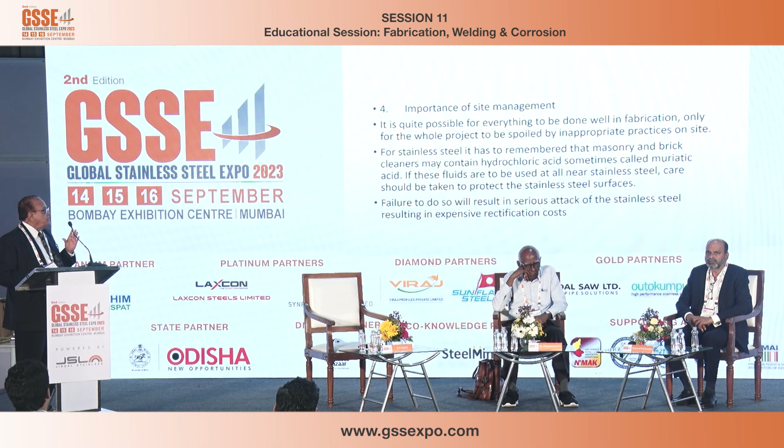Importance of choosing the correct grade for the application - I will not go into that. Sixth is cleaning and maintenance.

Seventh is the importance of seeking technical advice in cases of doubt. Don't be your own judge. If there is any doubt about the correct choice of grade, surface finish, or other aspects of a project involving stainless steel, the advisory services can be consulted. Don't think about the cost of the consultant - it will come back to you in a big way. It's like when doctors are needed - when something happens in your home, it's better to pay something for the doctor, because it will give you a return many times over.

Corrosion of stainless steel involves certain specific domains: metallurgical factors, weld solidification, and the corrosion of stainless steel weldments.

The corrosion problems commonly associated with the welding of stainless steels are related to precipitation effects and chemical segregation. These problems can be eliminated or minimized through control of base metal metallurgy, control of the welding practice, and selection of the proper filler material. This is a very important point.

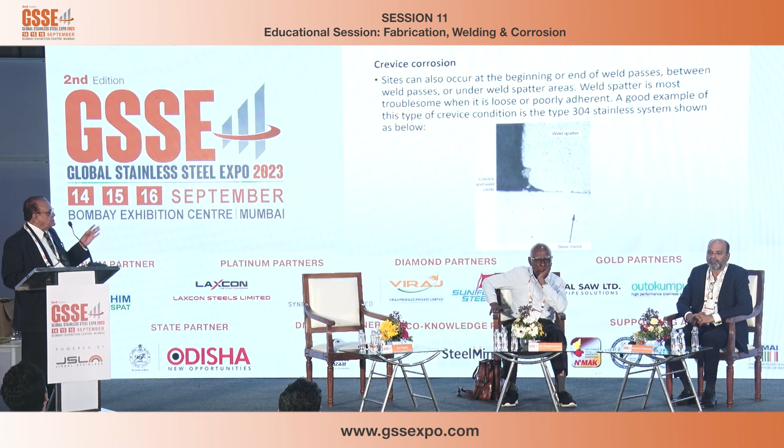Crevice corrosion is a vulnerable issue because it creates a lot of problems - being a noble metal, it will not adjust with anything. Sites can also occur at the beginning or end of weld passes, between weld passes, or under weld spatter areas. Weld spatter is most troublesome when it is loose or poorly adhered. A good example of this type of crevice corrosion is shown below. Incomplete penetration is also a point which leads to problems in the metal.